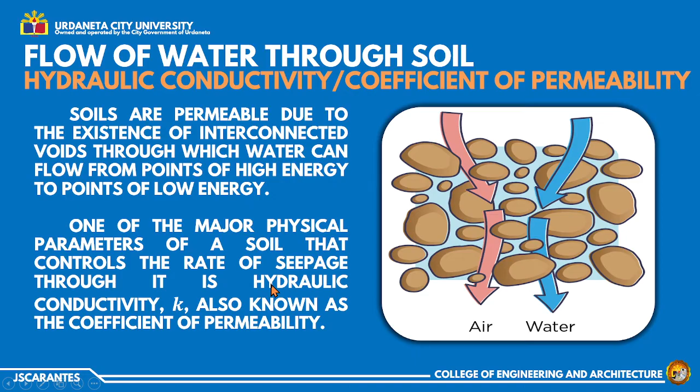Next is the Bernoulli's equation. This is actually more on the fluid mechanics side, but I want to go over this to give you some details on a formula that is very important here in permeability.

From fluid mechanics, we know that according to Bernoulli's equation, the total head at a point in water under motion can be given by the sum of the pressure head, velocity head, and elevation head. This equation here is what we call the total head, which is simply the sum of three types of head.

The first term is the pressure head. Pressure head is basically the pressure at a certain point divided by the unit weight of water. In fluid mechanics or hydraulics, P is used in the numerator. However, in soil mechanics, when we say U, this refers to the pore water pressure.

The next term is the velocity head, with the formula V squared over 2G. V is the velocity of flow and G is the acceleration due to gravity, which can be 9.81 meters per second squared or 32.2 feet per second squared.

And then the last one is the elevation head. When we say elevation head, this is basically the height from a certain datum. Let's look at our figure.

Dito, ang delta H sa figure natin, ito siya. Ang delta H dyan, the difference in piezometric levels can be expressed using this formula. Nawala na si velocity head, meron na lang ito para kay A, ito para kay B: pressure head at point A plus elevation head ni A, minus pressure head ni B plus elevation head ni B.

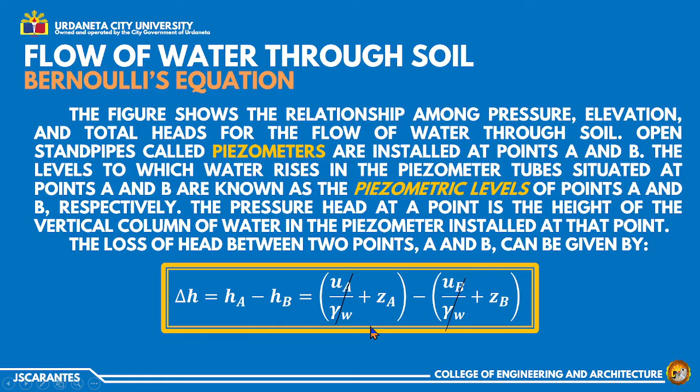Pero sinasabi ko nga din, possible din na even itong pressure head na ito ay mawala. So when that happens, ZA minus ZB na lang. Actually, ito ang mas maraming cases natin. Pero pinakita ko lang din paano kunin si delta H.

Si delta H kasi, dito natin siya actually kailangan. The head loss H can be represented in a non-dimensional form. Meron tayong formula dito for hydraulic gradient: hydraulic gradient is equal to delta H over L. So when we say hydraulic gradient, it refers actually to the slope lang.

Kaya sa hydraulics, si hydraulic gradient is the slope of the energy grade line. Isipin niyo lang natin, itong si I ay parang lang din siya yung M, maging calculus man or analytic geometry. Ito ay equal lang kay rise over run, di ba?

So when we say rise, change in the vertical location or vertical position, and then L, change in the horizontal position. So delta H, nire-refer natin siya as the difference ng piezometric levels natin, kung meron man tayong piezometers.

However, kung wala naman tayong piezometers, let's say sa mga cases ng dams, pwede nating isipin na si H is the difference in elevation ng water upstream dun sa water downstream. If ever walang piezometer, tingnan niyo na lang ang water surface na mas mataas sa water surface na mas mababa, so the change of elevation, basically yun din ang tinutukoy natin as H.

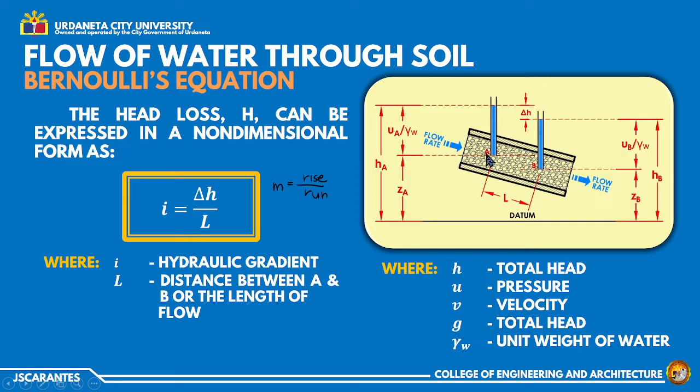Next is the Darcy's law. The Darcy's law govern the flow of water through soils. In 1856, Darcy proposed that the average flow velocity through soils is proportional to the gradient of the total head. Ito yung pinaka-formula nyo, basic galing dun sa Darcy's law natin. Sabi ni Darcy, si V, the discharge velocity or average velocity, is directly proportional lang dun sa hydraulic gradient. Si K kasi tinatawag natin siyang constant of proportionality, pero dito si K, ito rin mismo yung ating hydraulic conductivity or coefficient of permeability.

Sabi lang dito kay Darcy, habang tumataas yung value ng K, habang tumataas yung value ng I, tumataas din yung value ng average velocity natin. At eto, yung magkakaibang pangalan ng V na yan - small v, it can be called as discharge velocity, average velocity, or minsan tinatawag siyang superficial velocity.

When we say discharge velocity, actually parehas lang din siya - yung V na yan is yung V din dun sa formula na Q is equal to AV. Mula dito, pwede mo i-extract, sabihin natin si V equal lang din kay discharge or the flow rate divided by the area of flow. Parehas lang yung V na tinutukoy dito - eto rin si average discharge or superficial velocity.

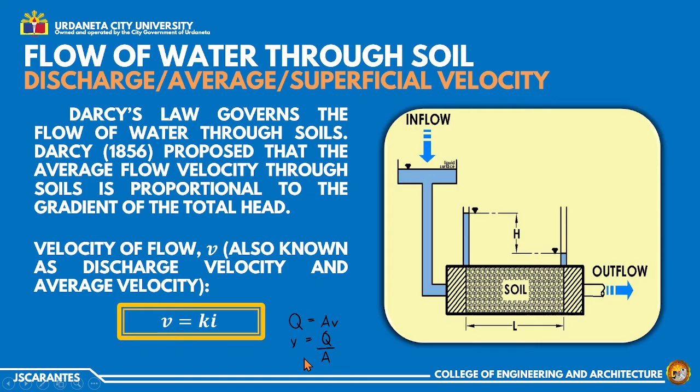Now next tayo - seepage, interstitial, true or actual velocity. It is another form naman of velocity. Yung V is equals to Ki is the discharge velocity of water based on the cross-sectional area of the soil. However, the actual velocity of water, that is the seepage velocity, through the void spaces is greater than V. The relationship between the discharge velocity and the seepage velocity can be derived by referring to the figure.

Dun sa formula na V is equals to Ki, ang consideration natin dun, yung area is the total area of soil specimen. Parang ganito siya at ang tinuturo ng aking cursor. Mula dito, kinuha natin yung Q is equal to AV. Yung area na yan, i-refer na lang natin as area total - ito yun yung tinutukoy natin. Multiply na lang natin ng velocity of flow, so nakuha na natin si discharge.

However, in actual, alam naman natin na merong void spaces. Sabi natin, si water nagfo-flow lang doon sa mismong interconnected voids - hindi naman pwede makapag-flow si water through the solids, kasi si solid particles parang obstruction siya dun sa mismong flow of water natin. So in actual, nagko-flow lang talaga si water dun sa mga empty spaces. Ang consideration natin dito, let's say yung area of void, denote na lang natin siguro as A sub V, and then area of solid particles, A sub S.

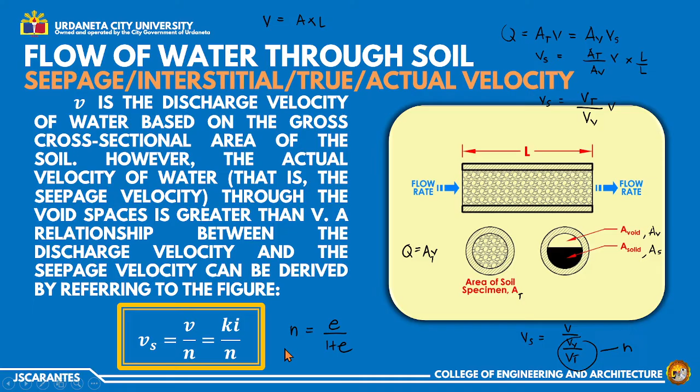It's possible that what's given for the soil is the void ratio, not the porosity itself, so you need to recall these soil properties. Next, the hydraulic conductivity of soil depends on several factors: fluid viscosity, pore size distribution, grain size distribution, void ratio, roughness of mineral particles, and degree of soil saturation. The hydraulic conductivity of unsaturated soil is lower and increases rapidly with degree of saturation.

Here we have typical values of hydraulic conductivity of saturated soils. No need to memorize this, just try to familiarize yourself with it - clean gravel, coarse sand, fine sand, silty clay, and clay. These are the K values for each.

By the way, the unit for hydraulic conductivity is unit of length per unit of time, like cm per second or feet per minute. I suggest you practice conversions, since it's not always cm per second or feet per minute - it could be kilometer per day, inches per minute, miles per hour, things like that. So practice conversion, but these are the most normal or common units for hydraulic conductivity: cm per second or meter per second and feet per minute.

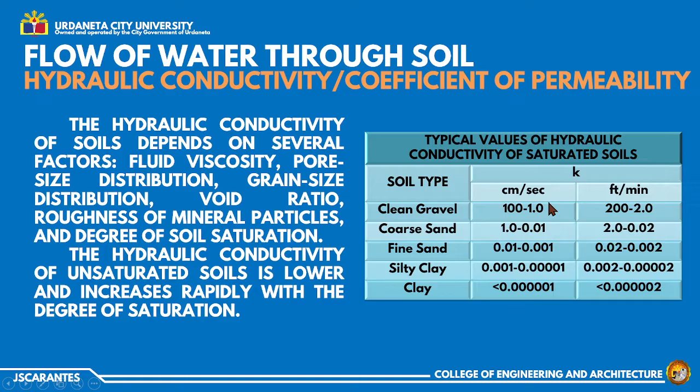Next, hydraulic conductivity of a soil is also related to the properties of the fluid flowing through it, by the equation: K is equal to gamma water over the viscosity of water times the absolute permeability.

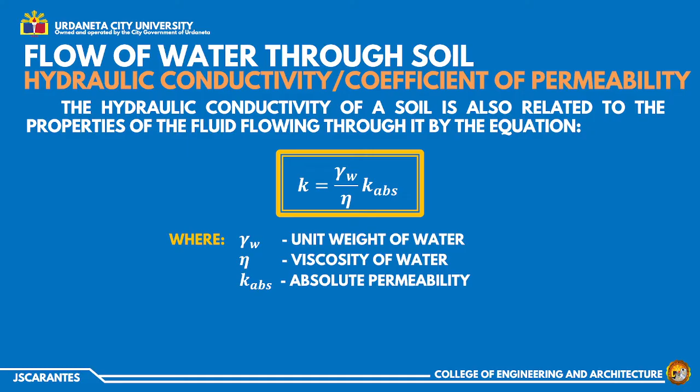What's inside the parentheses actually has values for temperatures ranging from 15 to 30. Just get the values from this table and place them inside the parentheses. This way you can approximate K at 20 degrees Celsius, or find K at a certain temperature in degrees Celsius.

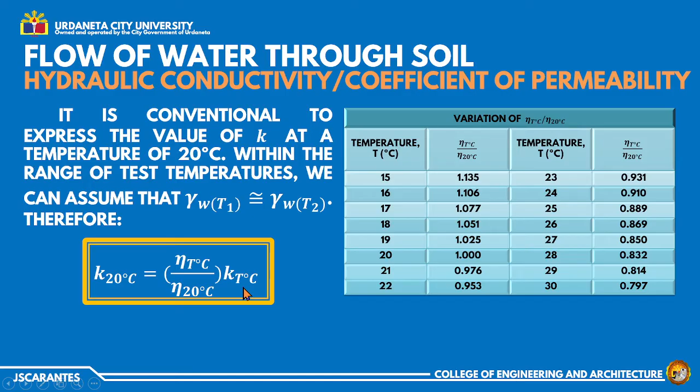Next we have the constant head permeability test. A typical arrangement of the constant head permeability test is shown in the figure. In this laboratory setup, the water supply at the inlet is adjusted so that the difference of head between the inlet and the outlet remains constant during the test period.

So to summarize, we have a laboratory setup like this. The specimen is placed in a cylindrical container and bounded between two porous stones, in order to maintain the length L of our soil specimen. Then we have a constant inflow here.

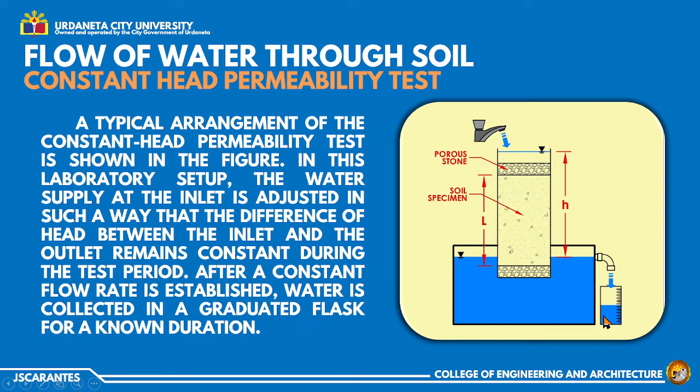So the total volume of water collected may be expressed as Q equals A times V.

When we talk about discharge or flow rate, this can also be represented as the volume collected at a certain duration divided by the duration time. The common unit for discharge is cubic meter per second.

If we want to get how much volume was collected in the graduated flask, that's the discharge times time. For example, we have 10 cubic meters per second, which is how much flows in per second.

So let's say we're asked how much accumulated after 5 seconds. We simply multiply by the time, 5 seconds. So we get Q equals A times V times T.

And V can be represented as K times i. We know that i equals H over L, or delta H over L. But here the notation we used for the difference in head is just H.

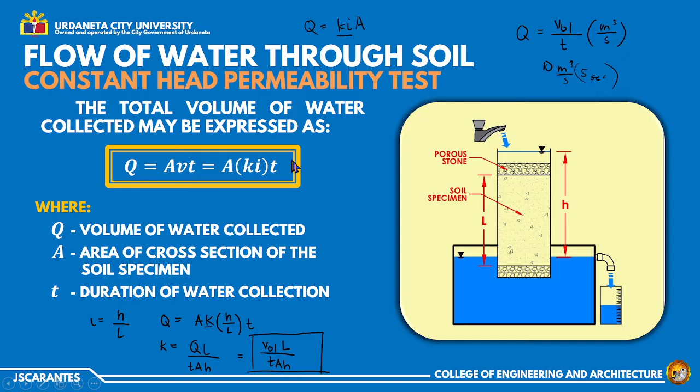So that's for the constant head permeability test. The formula again is QL over TAH, or volume collected per time.

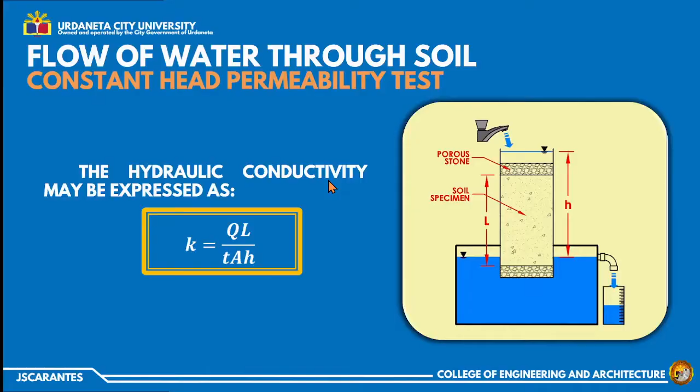Next is the falling head permeability test. Here, our setup includes a standpipe. Just like before, the specimen is bounded between two porous stones to hold the length L in place, so that L remains constant and unchanged.

In this setup, there is no constant supply of water. Whatever water fills the standpipe is what flows in. After some time, the initial water level in the standpipe will change as the water permeates through the soil specimen.

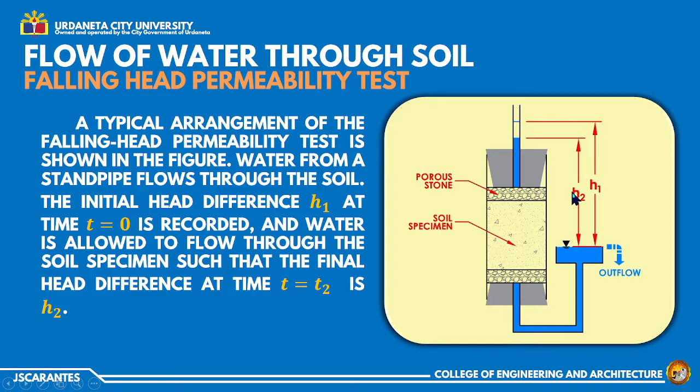The rate of flow of water through the specimen at any time t can be given by Q equals K, I, A. And this is equal to A times dH over dt.

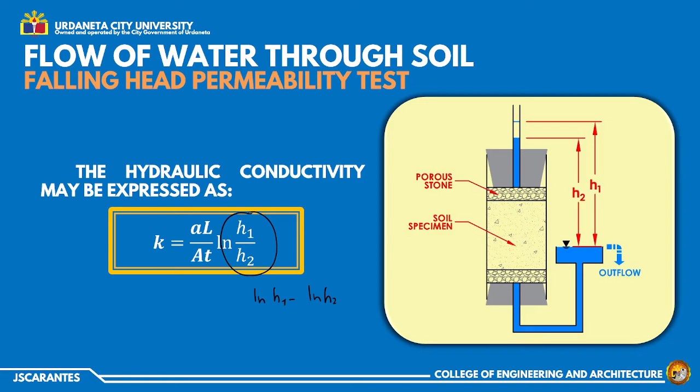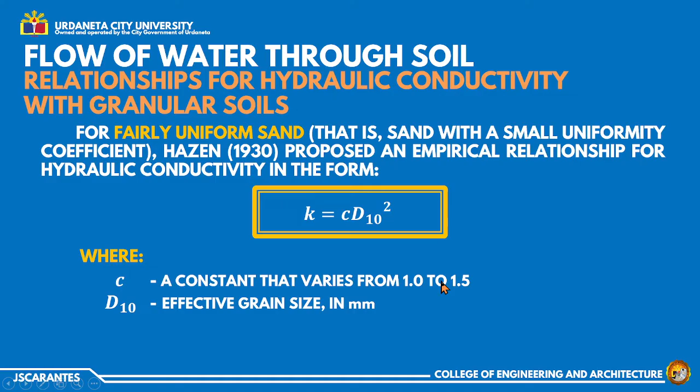K is equal to C times D10 squared. D10 is our effective grain size, which we get from our particle size distribution. And C is a constant that varies from 1 to 1.5.

Another equation is for sandy soil, according to the Kozeny-Carman equation. K is in cm per second. This is the formula, with many parameters. This is what I mentioned earlier, many tests were conducted. Maybe one of you will also create another equation for hydraulic conductivity someday. This came from Kozeny-Carman: 1 over CS, SS squared, T squared, gamma water over eta, which is viscosity. Here are the meanings of those parameters.

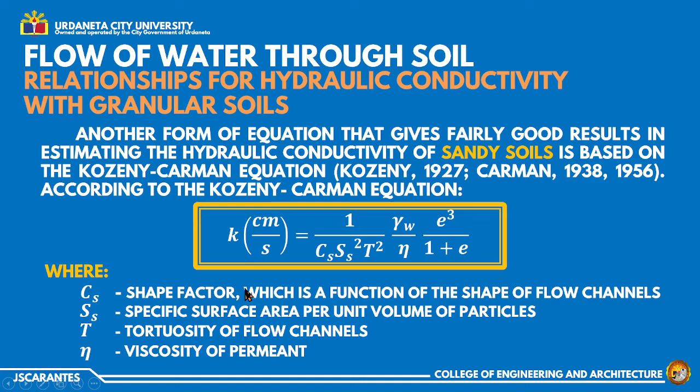Another one is according to Amer and Awad, 1974, for granular soil. We can use this one too. Take note, K is in cm per second, and D10 should be in mm.

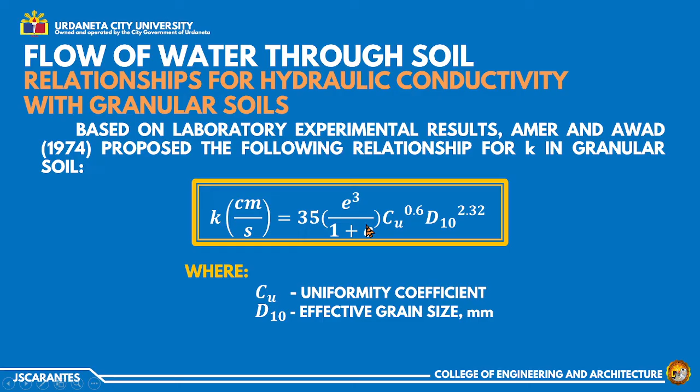Then another one, according to Taylor, 1948. This is more recent. Log K is equal to log K sub O minus E sub O minus E over C sub K. Here are the meanings of each of those parameters.

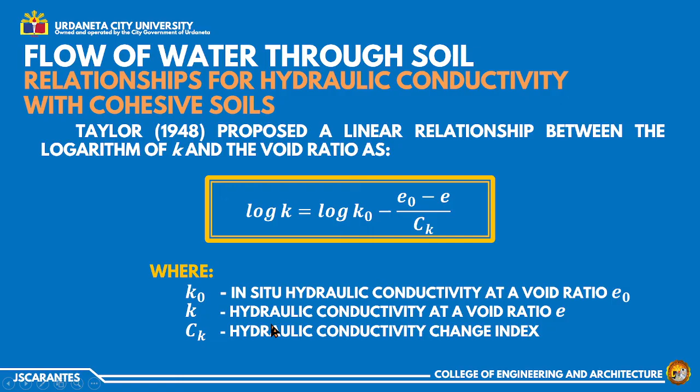And KV is for vertical, which is the normal or perpendicular flow. This is our equivalent for parallel flow, and this one is for perpendicular flow. When perpendicular, the direction of flow is perpendicular to the interface of each layer. Expressed as: H divided by (H1 over K1 plus H2 over K2 plus H3 over K3).

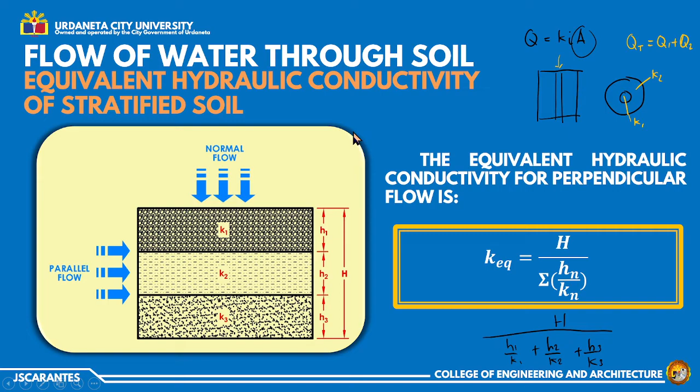Two-dimensional flow of water through soils: flow nets. Seepage losses through the ground or through earth dams or levees, and the related flow pattern and rate of energy loss or dissipation of hydrostatic head, are frequently estimated by means of a graphical technique known as flow net.

We have different rules or criteria for flow nets. The most important one: flow lines must intersect equipotential lines at right angles.

The quantity of flow through each flow channel is constant.